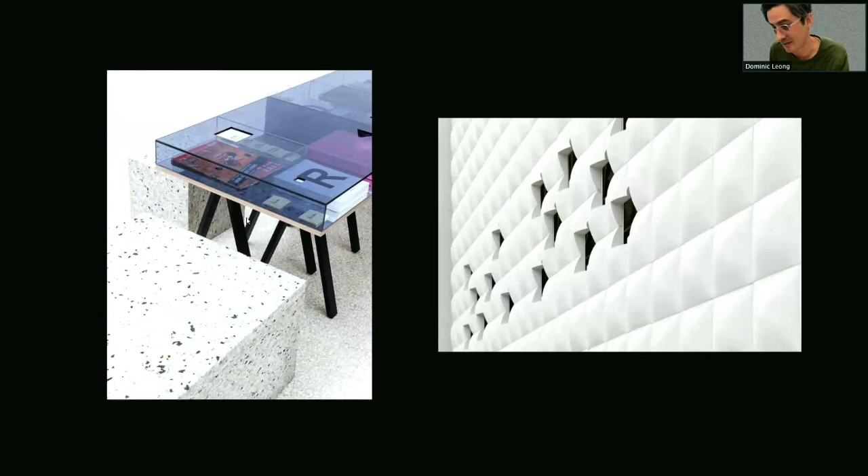organizations or even furniture. But we also think of ambiguity in terms of materiality and the idea that a clear, legible form's perception could be undermined by an almost surrealist use of material—soft concrete, foam that looks like rock, a folded surface that almost takes on the texture of water or a plant.

And Chris, we were supposed to do this like as a conversation, so it doesn't turn into a monologue. So if you want to add anything, just jump in. Yeah, I'll jump in. Okay.

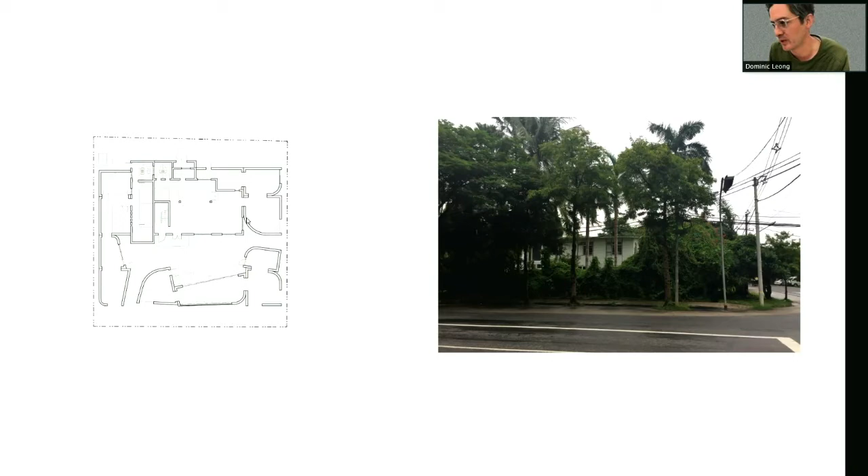Boundaries is also something we've been working through over the last 10 years at different scales. A project we were working on in Yangon within an existing building—how the architecture can actually create a new boundary, which would then produce a kind of in-between space between the old and the new.

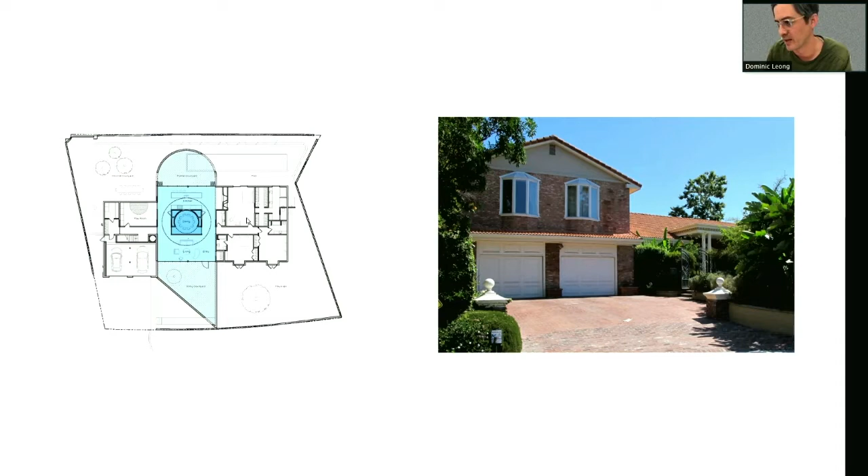And how that translates into a suburban house in Hancock Park, which we couldn't actually design more than 50% of because of an HPOZ guideline. So the approach was really thinking about the lot line and the boundaries that exist within the existing footprint, and how the introduction of a figure could start to reconfigure the inside and the outside relative to the existing lot.

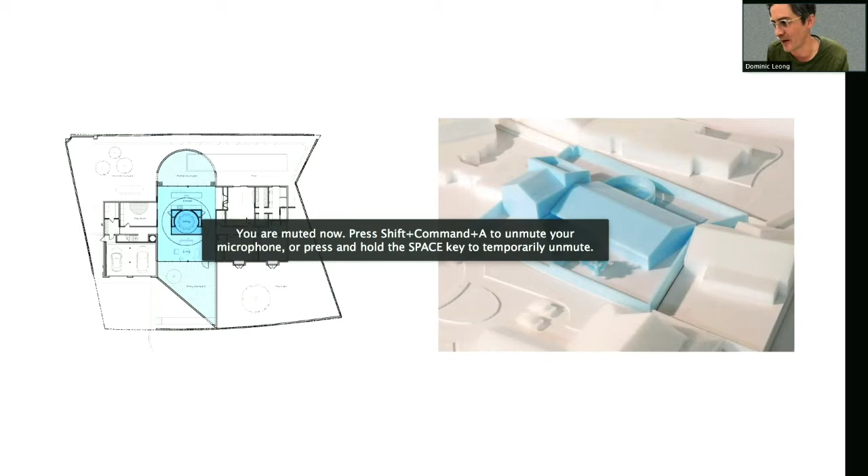So what you see here is a 50% transformation of a ranch-style house into a kind of domestic sanctuary that starts to flip the inside and the outside in the tradition of California modernism, I guess.

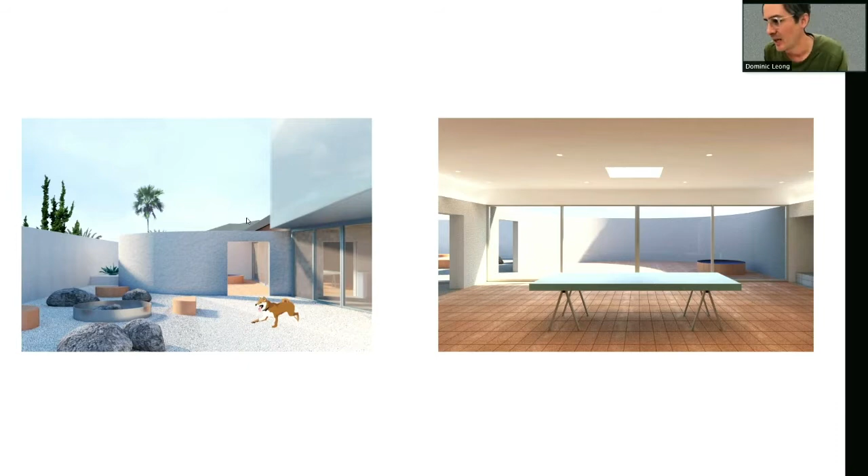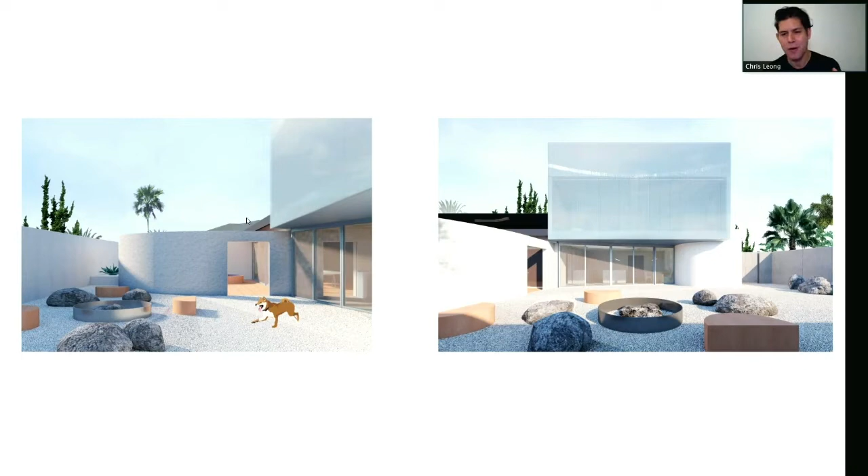I think just to add, Tom brought up an interesting point about thinking about projects from the inside out, and that's something we've always kind of done. The boundary is something we've always identified with and as something to subvert, thinking about the liminality of how to operate on both sides of the boundary, or to subvert a boundary in many cases.

The other idea we've been working through in the last few years is convergence. Maybe it's an update of hybridity, but convergence is a technological term—an iPhone is a good example. It's like the sum is more than the parts, bringing together what were previously separate devices or technologies: phone communication, computer communication, social media, et cetera, and that convergence also plays out in the hybridity between the virtual and the physical.

We recently worked on an incubator with New Inc for mixed reality, which was really a new type of workspace that equally prioritized the capturing of mixed reality or virtual reality within physical space that could transform on a daily basis.

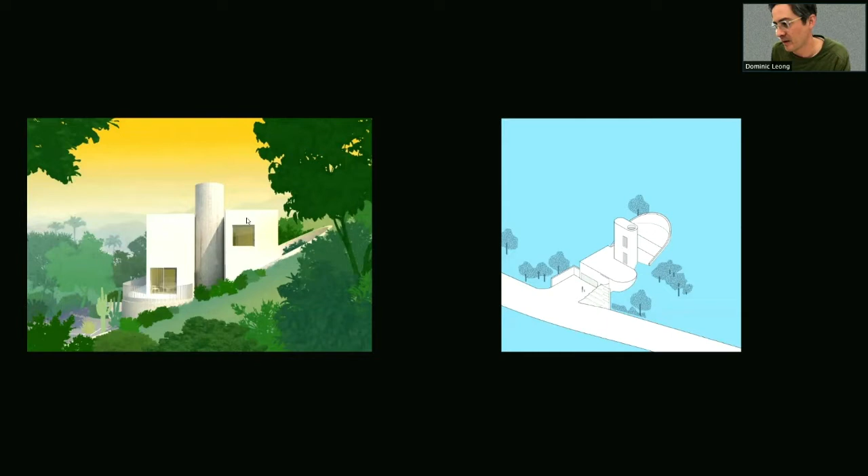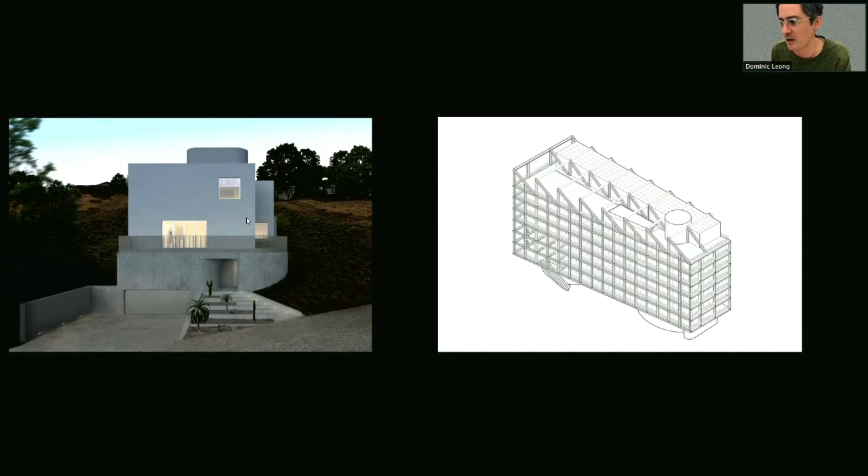We're also interested in the hybridity of structures, or the convergence of different construction types. In this case, a modular house in Mount Washington combines a poured-in-place concrete foundation with four modular prefabricated panels that form a compressed update to a kind of starter home, incorporating a thermal chimney.

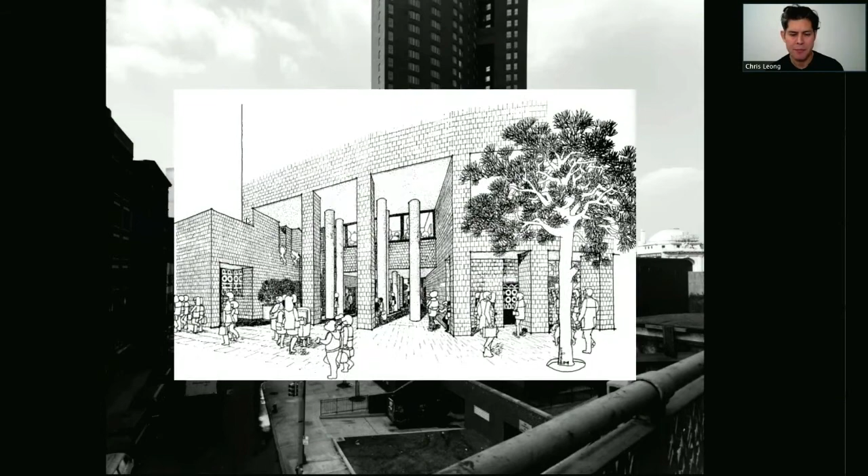Chris: Our office is located in Chinatown, downtown New York, a couple blocks from this building here, Confucius Plaza. I used to live right across the street on Division Street. But the story begins here in 1974 with an organization called Asian Americans for Equality, which formed as a civil rights activist grassroots organization in Chinatown when they saw Confucius Plaza being built and realized there was no Asian American representation in the construction of the building, in the architecture itself.

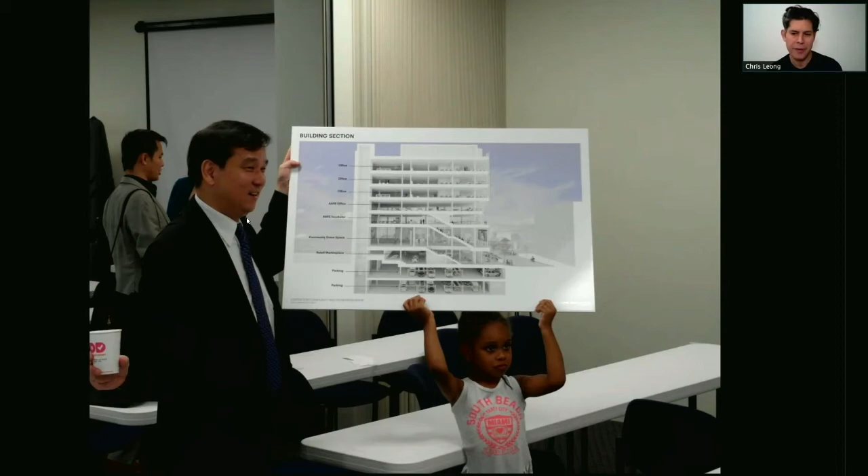They've since grown to become one of the largest affordable housing developers in Lower Manhattan, with a footprint across the city, primarily in Flushing, downtown New York, and Sunset Park, serving a variety of groups, not just Asian American groups. They also provide social services, financial services, and many other things.

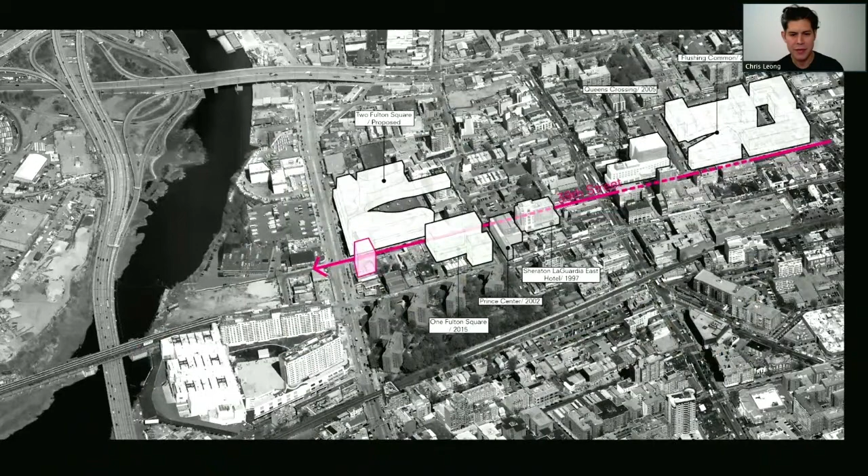So we've done quite a few projects with them. This is one in Flushing, right off of Main Street on 39th Avenue, which actually has the highest foot traffic outside of Times Square in pre-COVID times.

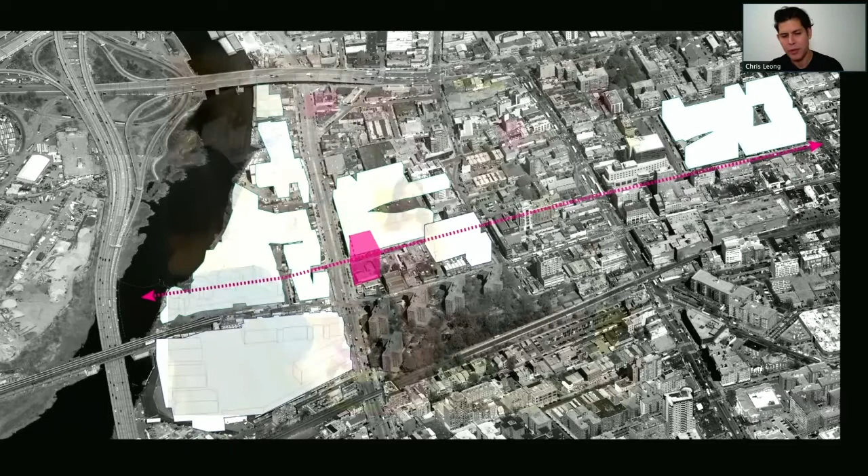This is the thoroughfare leading from downtown Flushing to the waterfront, which looks out to Willets Point. This project was to be their first ground-up project that served multiple communities as a 4-pronged space: an office space, an incubator, a headquarters building, and a food hall marketplace.

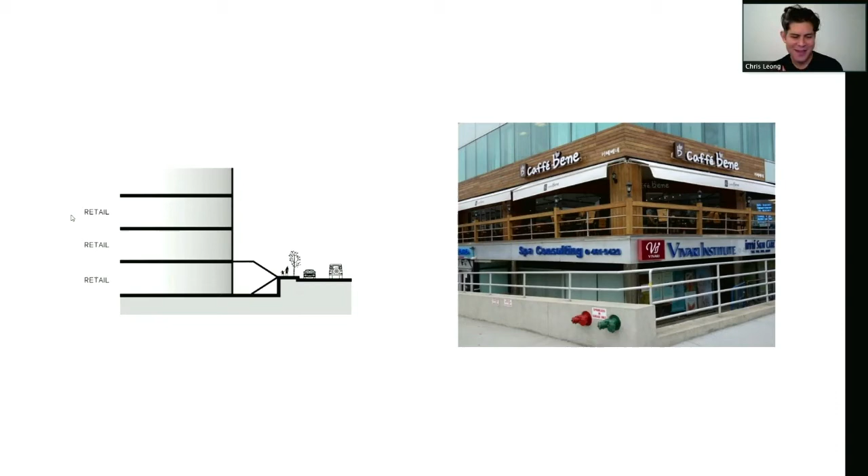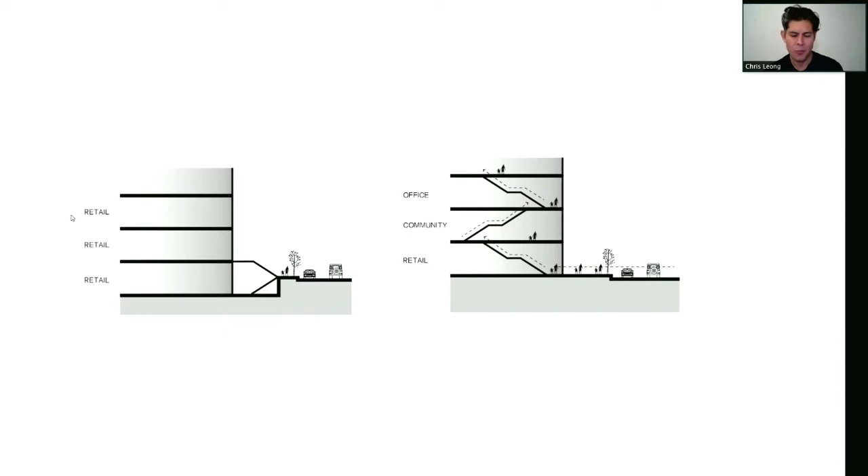One of the things we were really interested in working in Flushing was a unique type of urbanism that you don't typically see in other parts of this city, which is a very dense vertical stack that happens right off the sidewalk. So you're getting retail at a cellar level, at a half level above, and even up. There's a verticality and density that you might see much more in typical Asian cities. That was very interesting and specific to Flushing, and that informed this project.

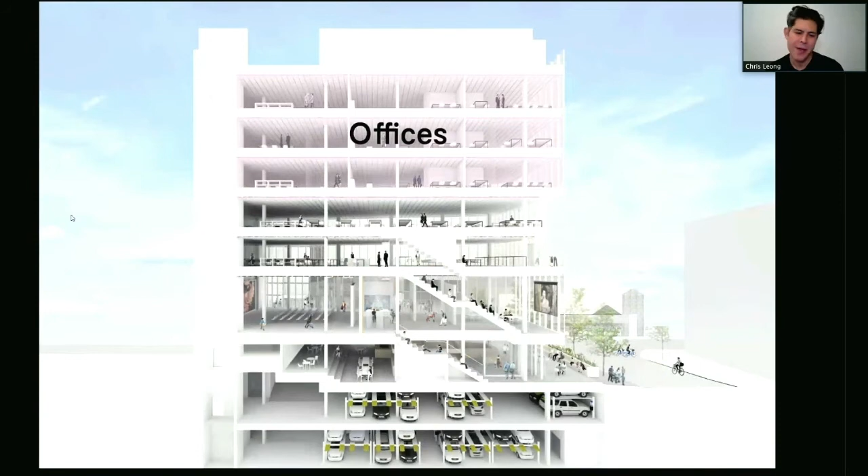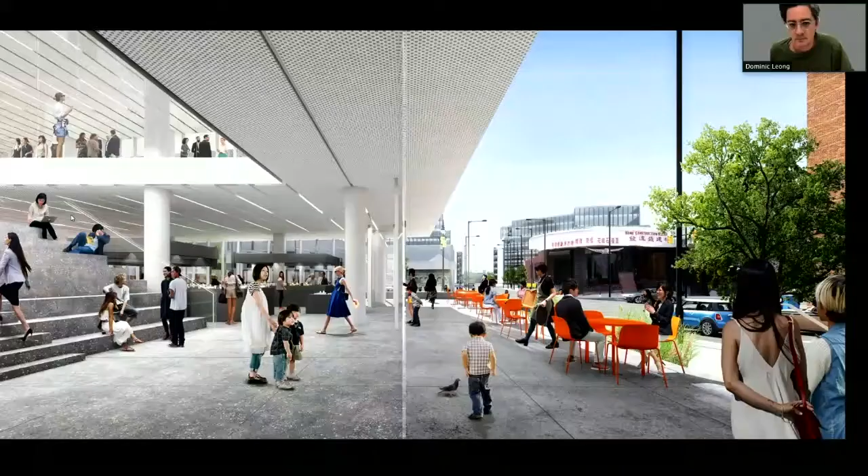It's called the Center for Entrepreneurship and Community. I think one of the main things is to create a mixed-use building that wants to really activate with the street. What's a way in which we could do that? By stacking the building, we created this communicating stair that wove through the first 3 levels, which both served as an informal gathering place and an entryway, but also a kind of front porch that would allow all the activities on the interior to be on display to anyone in the community.

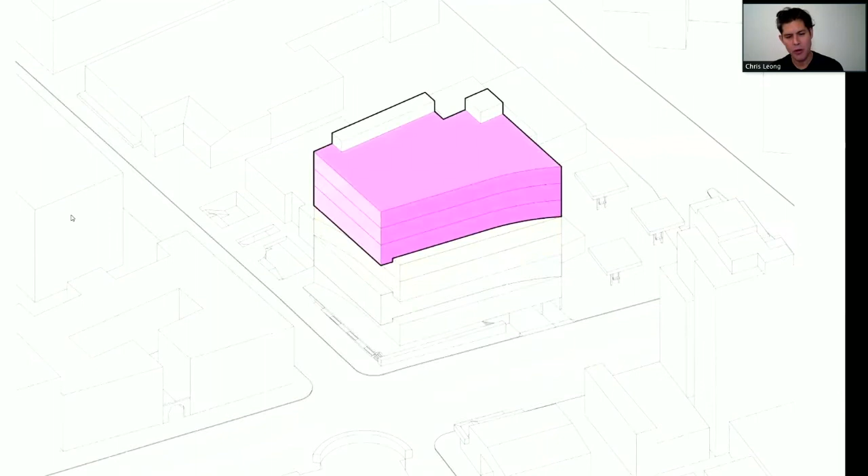The building itself, which occupies a corner site looking out into the Willets Point area, is really a stack and interlock of these 4 volumes representing these 4 programs. The interlocks both connect but also create outdoor spaces, these terraces, while also defining each of the 4 volumes.

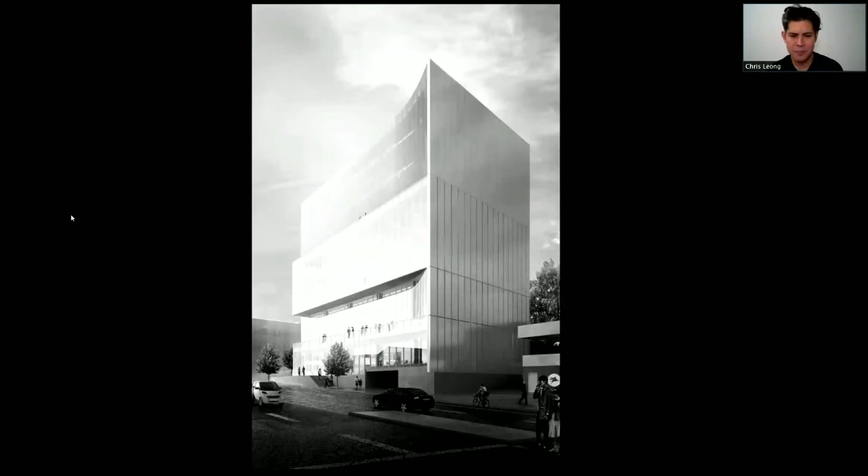We articulated the facades with a gradient of opacity as it went further up, taller up in the building. So here we're looking out into it—the idea of the building is really on display.

Another project we've done with Asian Americans for Equality, going back into Manhattan, is thinking about the kind of growth that's occurred in the city over the past decade.

Everyone's very familiar with the High Line, which also started as a grassroots community public space project, but has since morphed into this armature for hyper development in the city. It begs the question of who this development is for, who the city is for. There's been a lot of criticism launched against Hudson Yards and projects around the High Line.

It's for a senior affordable housing project, and the site happens to be on a community garden that's owned by the city—two essential elements within the city that shouldn't really be pitted against one another, but happen to be in this project. So it's a very charged project, one that's also 2 blocks away from our office, so one we're very familiar with.

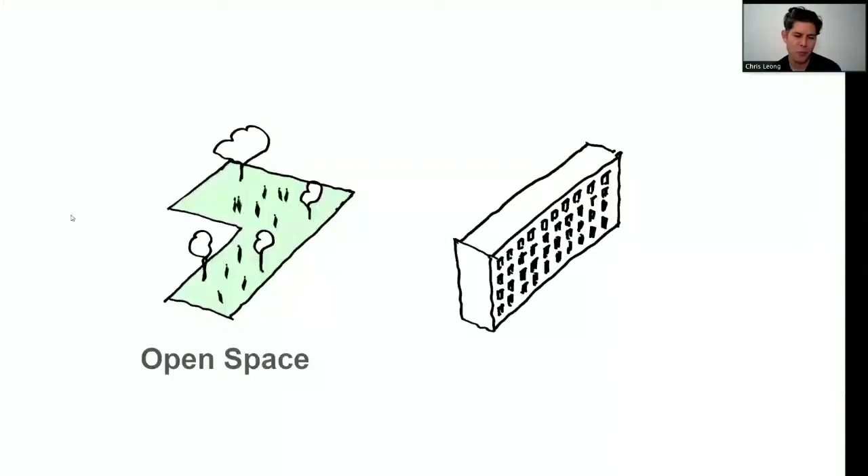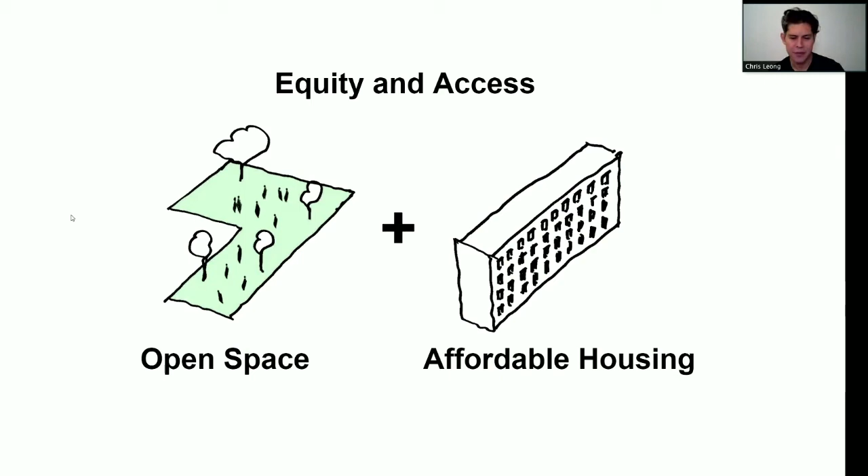When Asian Americans for Equality approached us, they said we can't look away when someone else will develop this project, since it's within our neighborhood and something we should weigh in on. They said we're going to do it, but we should break the rules. The first rule they broke was the idea of how to maintain this open space, maintain the community garden, create equity and access on the site, and still provide affordable housing. So the approach was about them, as a developer, willing to take the land and deed it over to a community organization to steward it, and subdivide the lot so the entire lot wouldn't be developed. This opened up an opportunity to think not just about the lot from the streets, but about an internal network of green space that could be activated by opening up the property rather than maximizing its buildable area.

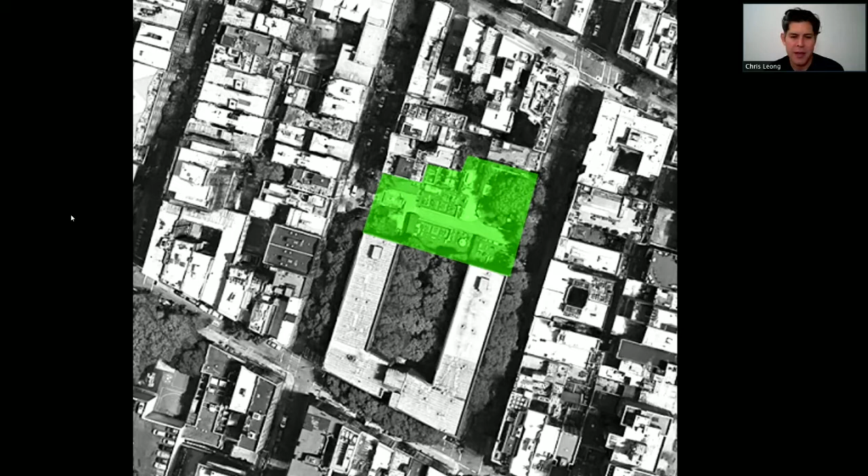So here's a lot between two streets, Mott and Elizabeth. And here you can see this internal network of green spaces, which are not usually publicly accessible at all.

What's my clicking doing, Chris? Yeah, we're kind of out of sync, but it's cool.

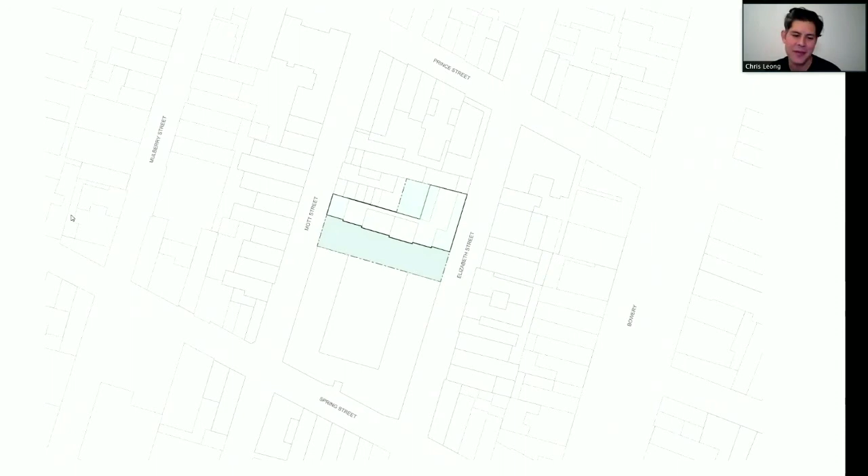Keep clicking. So the strategy here is to take a sliver of the lot for a through-lot connection, that would be a community garden space that would open up and create a new mews within the block and create a south-facing facade. So the building becomes a kind of L-shaped building.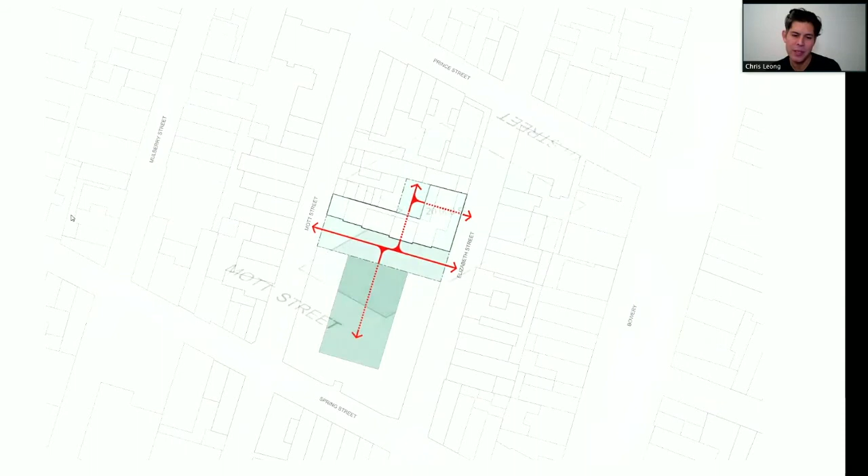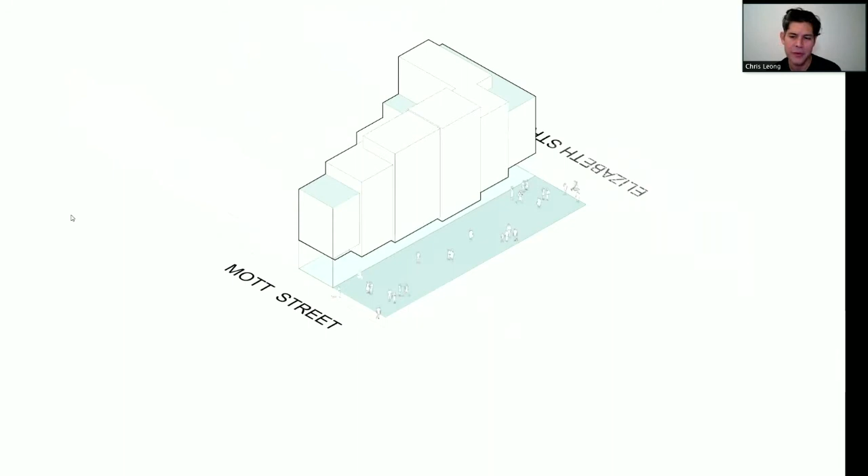This is what the as-of-right building would look like, and this was our proposal, which creates a south-facing facade, a totally different condition of storefront right at the garden level, which we would then lift the building up to create a whole publicly accessible space usable year round, with indoor space and doors that could be opened.

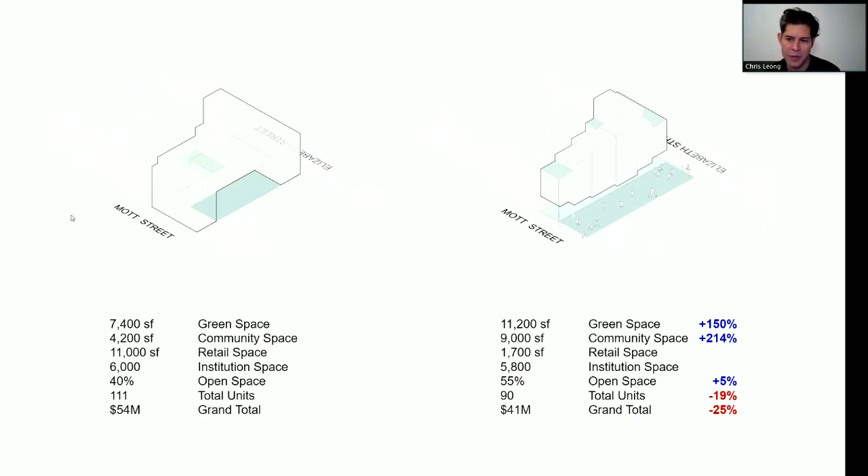This idea of creating a new internal network was very intriguing, and we could do it while still achieving almost the same number of units as the as-of-right scheme.

The building's tenants were not just AFI, who would operate a senior center space, but also Storefront for Art and Architecture, which is around the corner, and was going to occupy the ground floor. So here you can see that section.

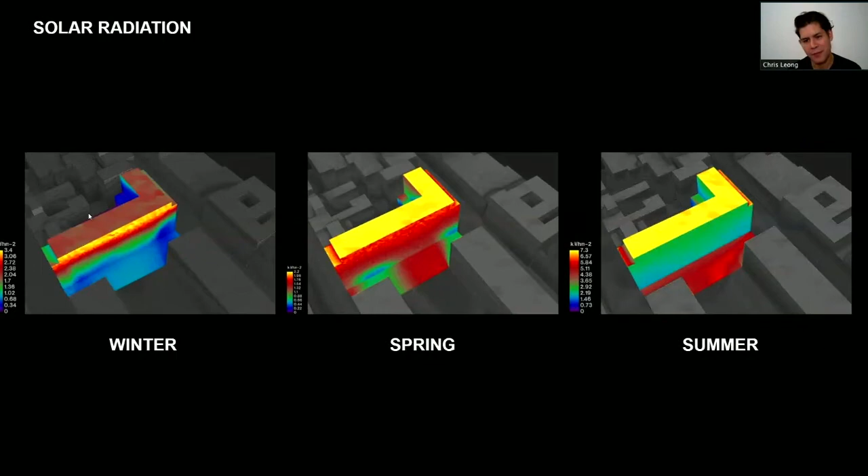The building was a single-loaded corridor, passive house construction, maximizing this southern exposure so that seniors living there could have a view of everyone in the garden. The windows were larger and closer to the ground, then skinnier toward the top to maximize the gain.

So, the Los Angeles LGBT Center — this is a project that was an RFP back in 2014, an RFQ, which we participated in.

At the time, we thought our chances were pretty slim to win, but we thought it was an important project for a lot of different reasons. Partly because of understanding the evolution of the LGBTQ rights movement, often attributed to the 1969 Stonewall riots, but Los Angeles actually had a significant activist movement dating back to 1959, the Cooper Donuts riots or protests, and a series of events that precipitated and planted the seeds for what became the current-day Los Angeles LGBT Center.

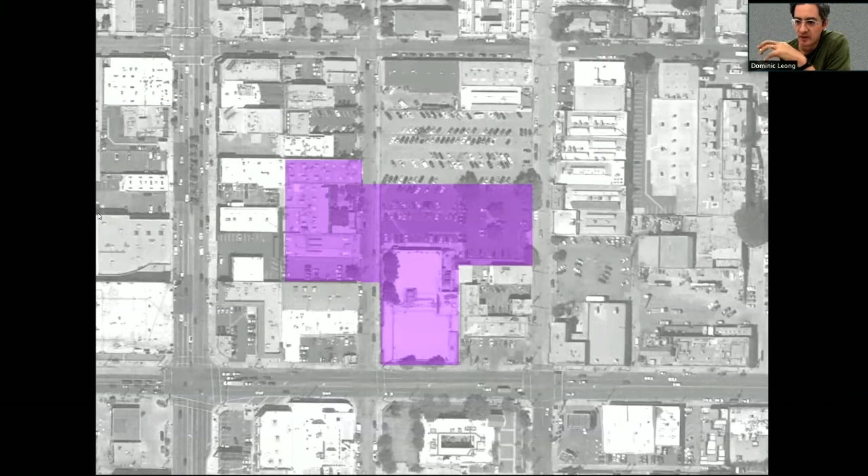This was, in a way, a first opportunity for us to really think about transitioning from interiors to a kind of urban form, and how that would actually create a new urbanism within the context of this part of Hollywood. The project is really defined by a network of needs.

Early on, we were researching existing facilities, LGBT facilities, and there was an emphasis on security and discretion, understandably, for clients coming off the street.

This is the youth center on Highland, which is more or less an opaque building for at-risk youth that has no windows. So we thought architecture could play a really significant role.

We went to visit the Harvey Milk School here in New York, and it was really interesting learning about the design of that high school, which was intentionally designed not to look like a traditional high school, in order for clients coming from normal high schools to actually be in an environment that opened up new possibilities in terms of how the space worked.

The project also kind of exists at the intersection of LGBTQ homelessness and the larger housing crisis in Los Angeles, which you all are probably aware of.

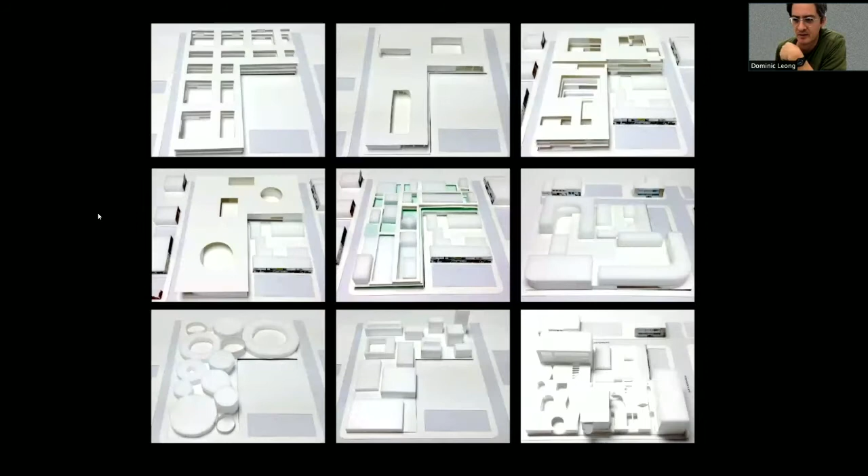So we went through a series of studies to kind of develop a language. We were looking a lot at the institutional scale of mat buildings, but recognizing that they sort of lacked figuration or identity, or a kind of multiplicity of identities.

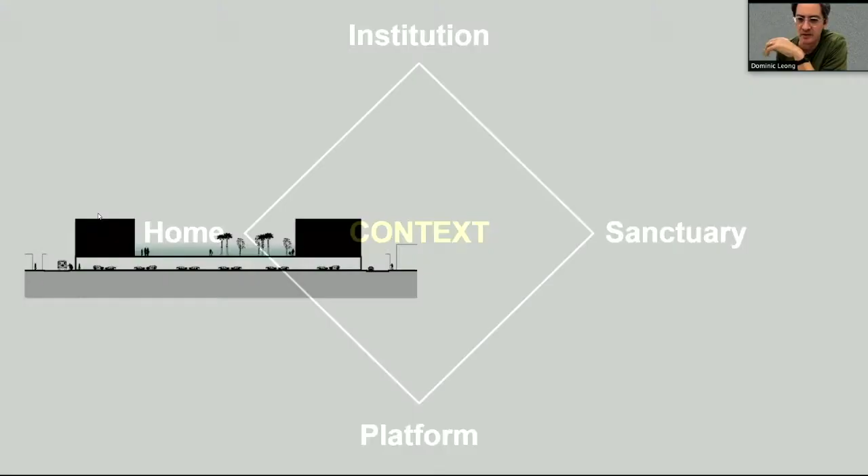So we're really exploring how to evolve the mat building, as well as thinking about context and how this building would have a certain degree of porosity to the context while maintaining necessary safety and security.

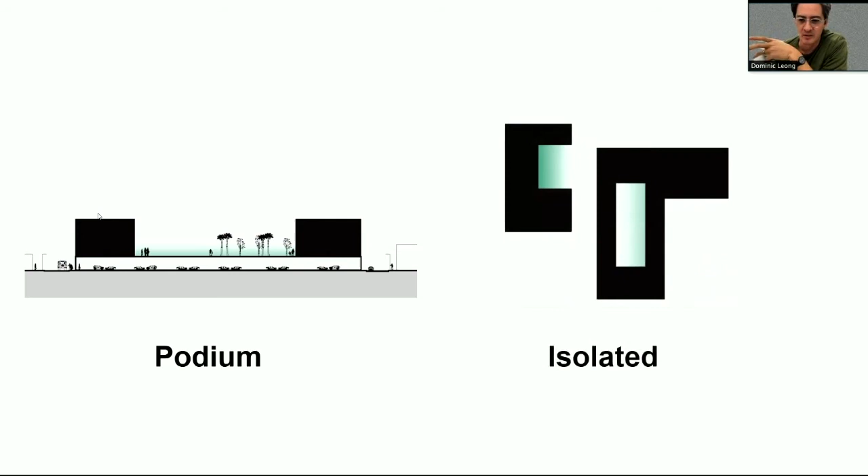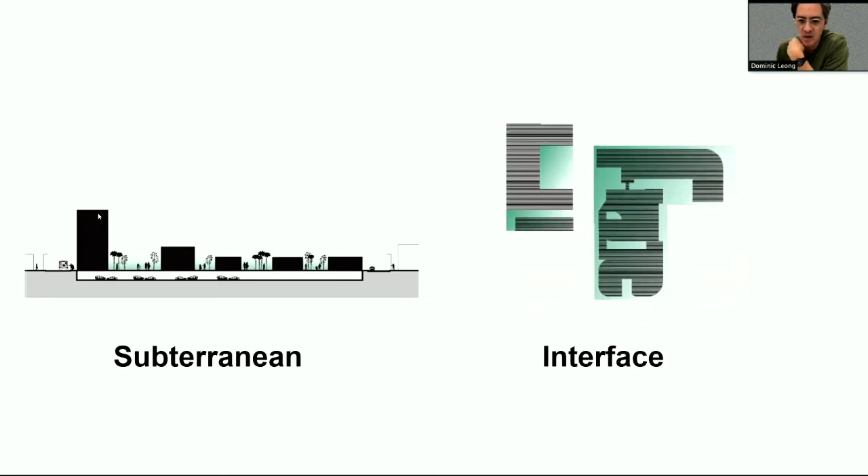The biggest move in the project, which is the most invisible one, is actually submerging the parking to avoid a podium parking scheme, which would create an isolated kind of urban interior space. So we proposed submerging the parking, which more or less set up the whole project to create this porous interface with the existing neighborhood.

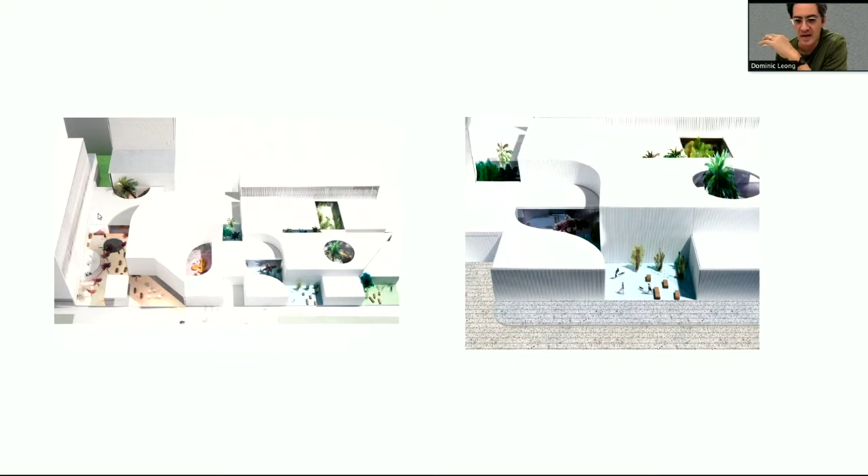Some early studies of developing this language of flipping back the figure and field, the solid and void, the indoor and the outdoor spaces, and thinking about how the outdoor spaces would actually start to create the atmospheres for the interior.

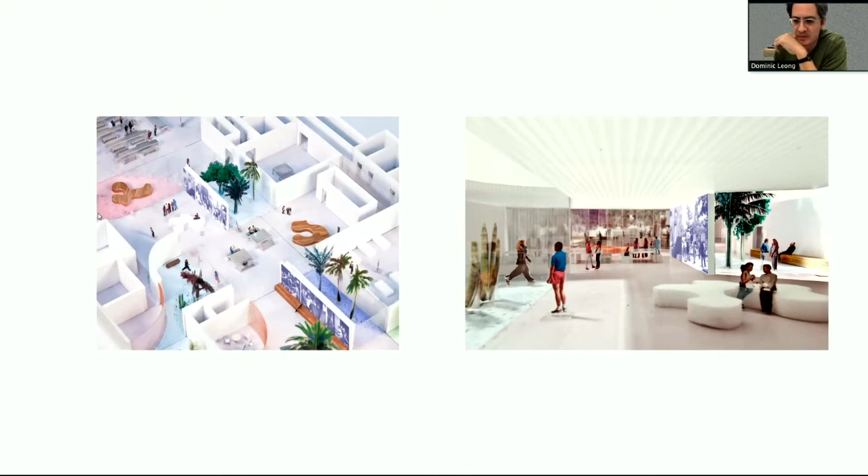And so you can sort of see this evolution of the mat building taking on certain kinds of spatial figures. And through the evolution of the program, it actually became pretty dense. The building got thicker and taller, which was quite challenging in terms of maintaining that porosity.

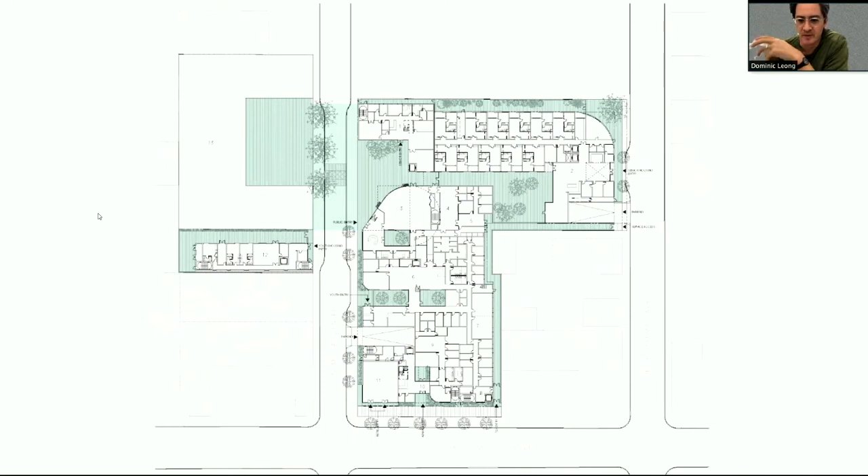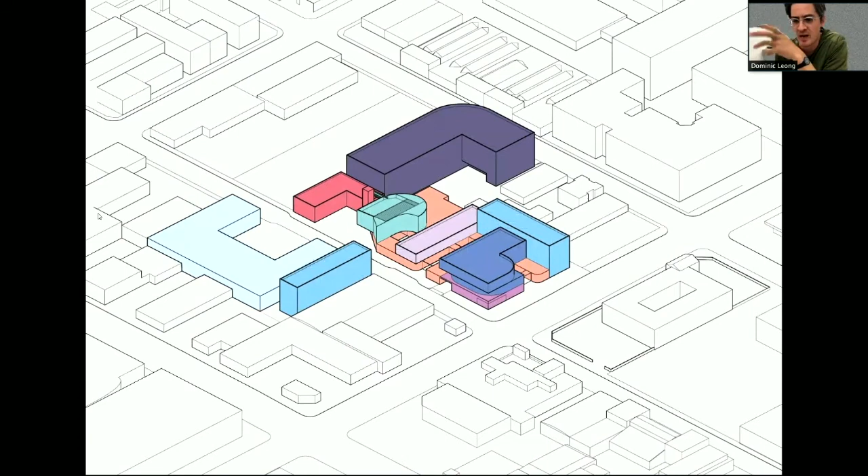But here you can sort of see how these puzzle pieces of programs start to fit together to create a larger mosaic of a horizontal organization. And so this horizontal organization is punctuated by larger volumes on top, which create this urban form that has no singular identity.

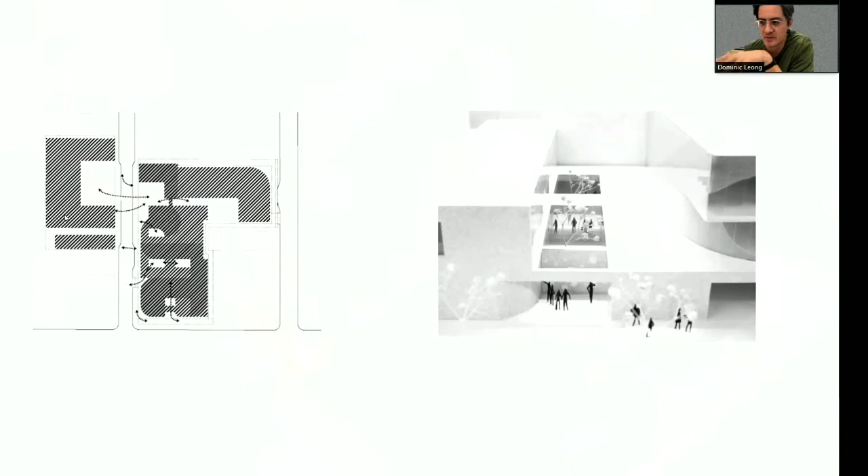There's over 6 different entrances. So we're really thinking about how the building form could be both single story to create a more domestic scale entrance for the youth center, creating outdoor space, which is really important for a lot of the houseless youth living on the street who don't have access to safe outdoor space. So we were really thinking about how these courtyards could provide that.

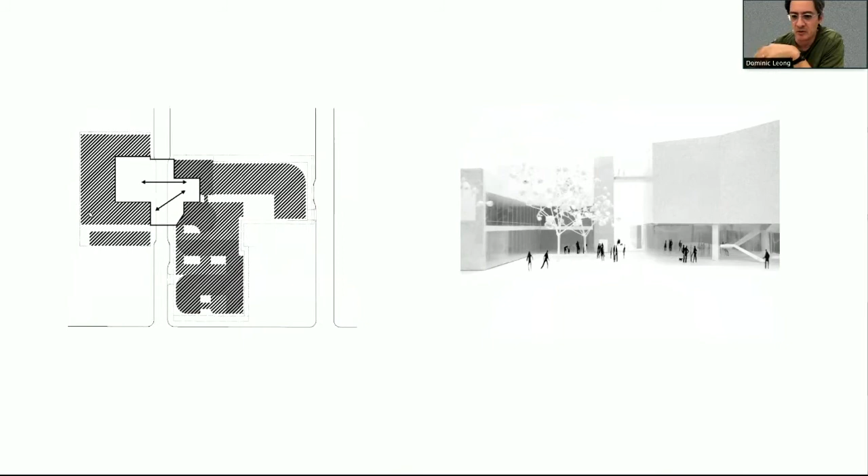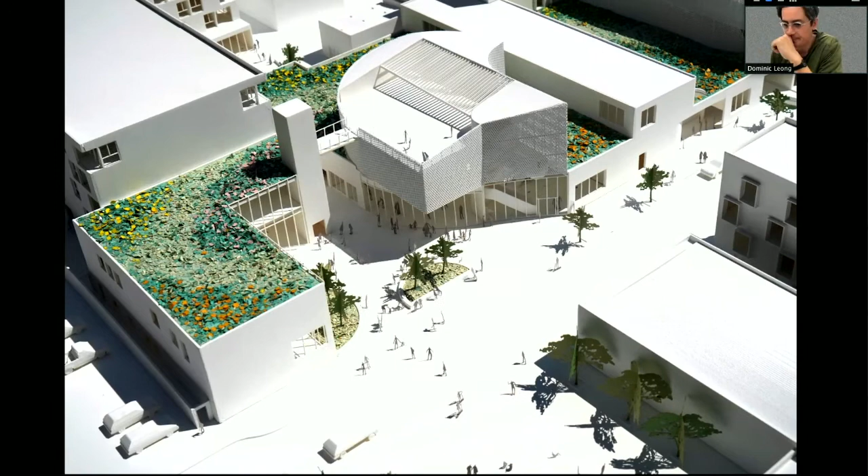And then the other urban move is really about creating this plaza that would link back across to the courtyard of the village of Ed Gould and create a new pedestrian-oriented urban room. And then the 2 and 3 story volumes on top, which create that urban form.

And so the other device that we were using to sort of activate the project at the scale of both the car and the pedestrian are these anamorphic projections, which create circles if you stand in 3 different locations. They cut out of the frit pattern to create a transparency through the facade.

And so you can kind of see how as you move along the building, it changes scales. It goes up, it goes down. So there's a sort of syncopation of building forms that starts to create a layering.

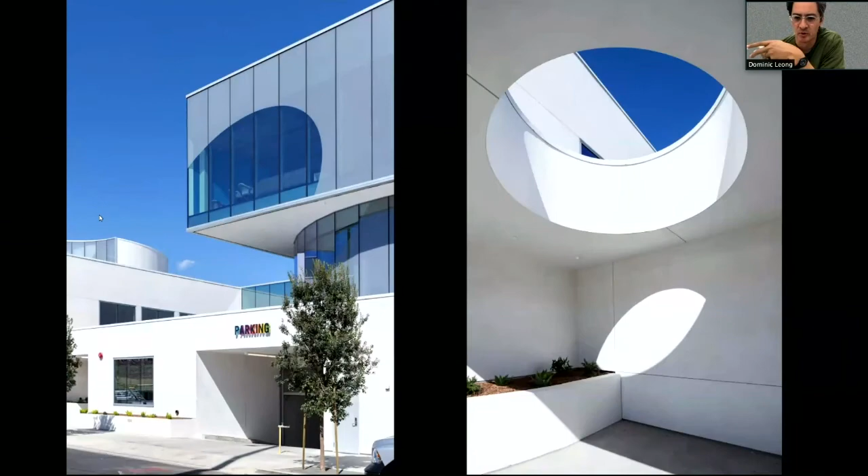And we're really interested in breaking down the solidity, the monolithic size of the building, so it seemed approachable from the street. And the openings in the building are very specific along the street edge to provide privacy.

This is the youth center entrance. So the building opens up and closes down in very specific ways in order to be both inviting but also safe and secure.

And so you can see down into the courtyard of the youth center to the right, and just a glimpse of the courtyards that are slowly growing in, creating this kind of lush interior. And this is sort of the heart of the project.

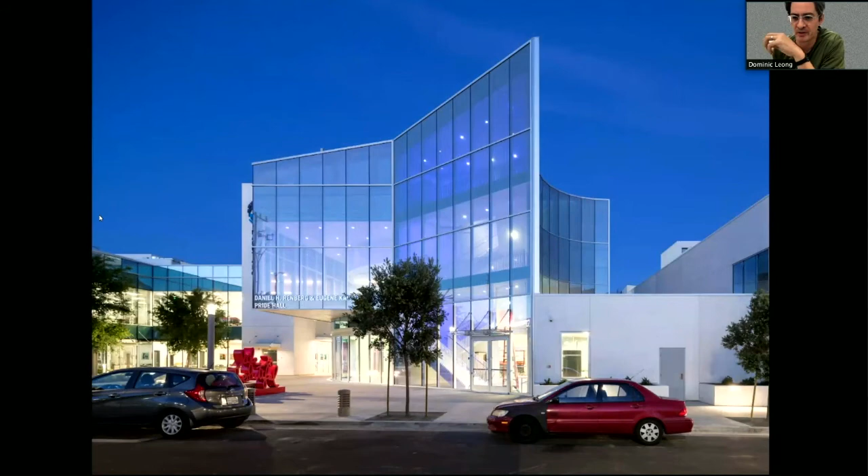Which is the Pride Hall, which functions as an event space, but also has a cultural exhibition space, a rooftop terrace, and more or less bleeds into the plaza just adjacent to it and opens up onto the senior center.

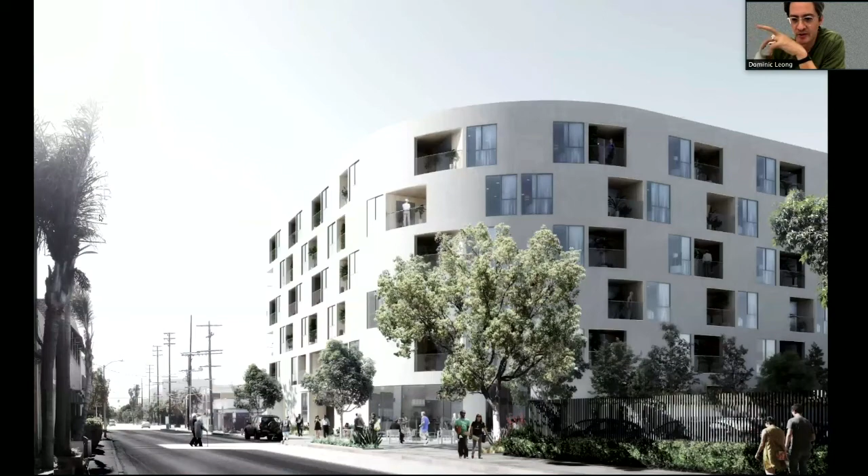And currently under construction are the 100 units of senior housing, and the youth transitional living program across the street on McCadden. And the star-studded opening was last April of 2019.